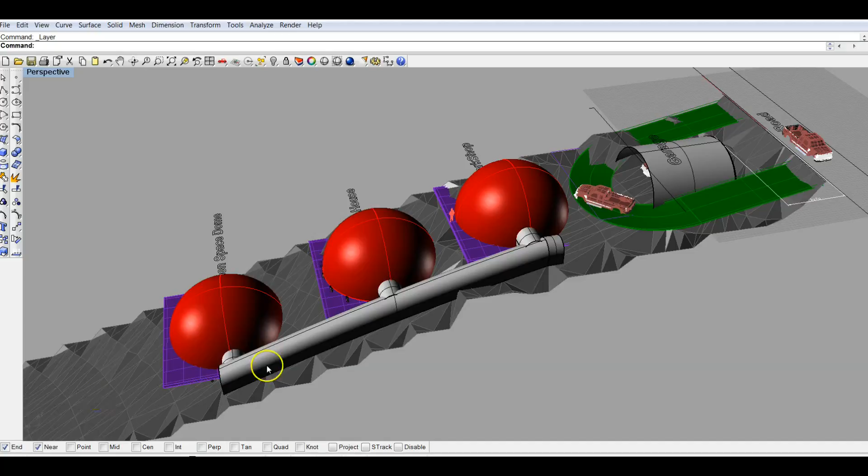So I'll show you a diagram of the property here. What you were just seeing was basically from sitting on the roadside looking down the property. So for this property, being how the land is sloping down like you see here, I came up with a design basically as a step platform.

My intention was to build 3 forty-foot domes going down the side of this mountainside, down the side of this hill.

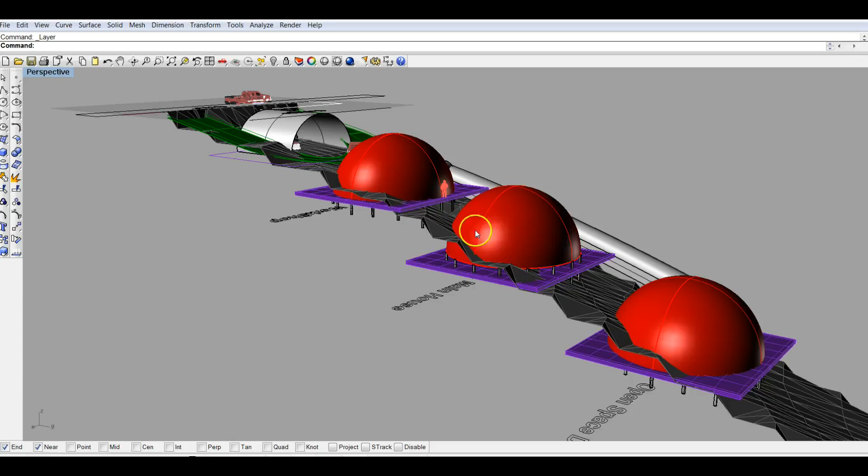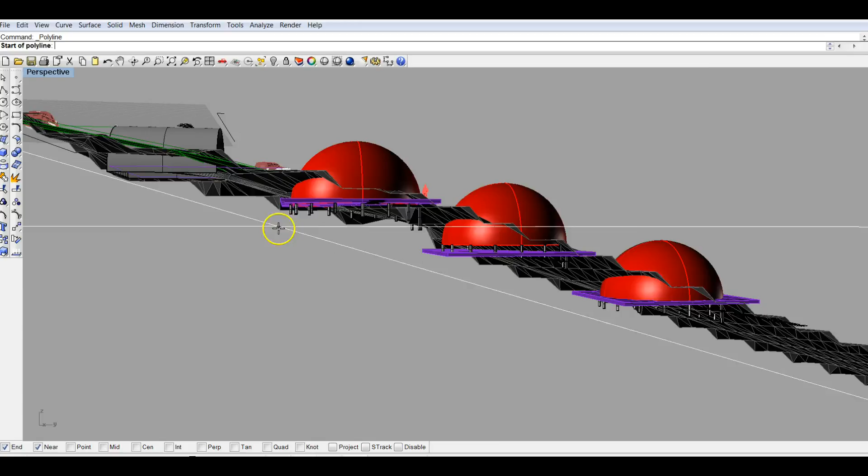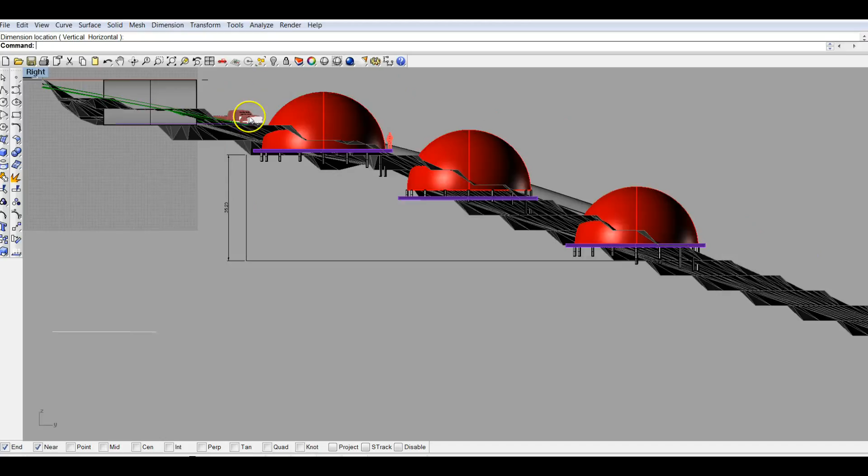The idea was to make these platforms and have as little soil to level out as possible. So I didn't want to go ahead and level out all of this soil to make a level ground, because it would have cost a lot of money to level all of this soil out. Say I wanted to level out from here to here, this would have been a lot of soil. This would have been 35 feet of soil, so it was a bit much.

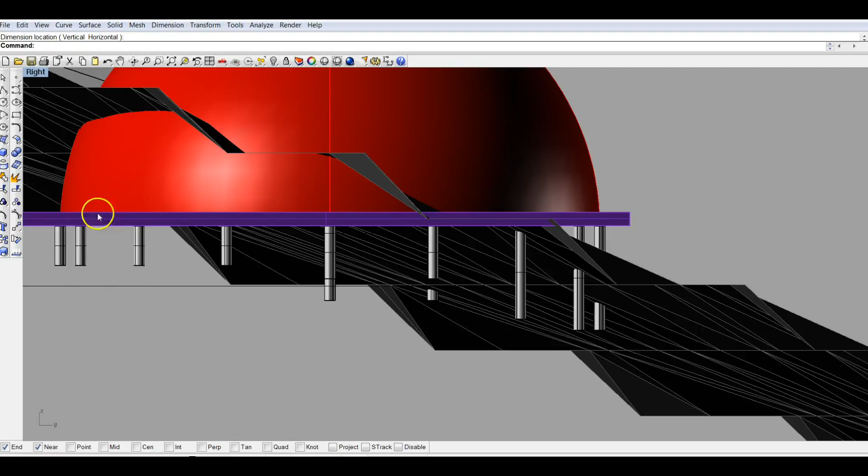So my idea was to build these columns into the soil that would give it support. You could see here it would basically stick out of the ground. One end of the dome here would be on the mountain, and then these columns would go into the soil so that you could build a platform.

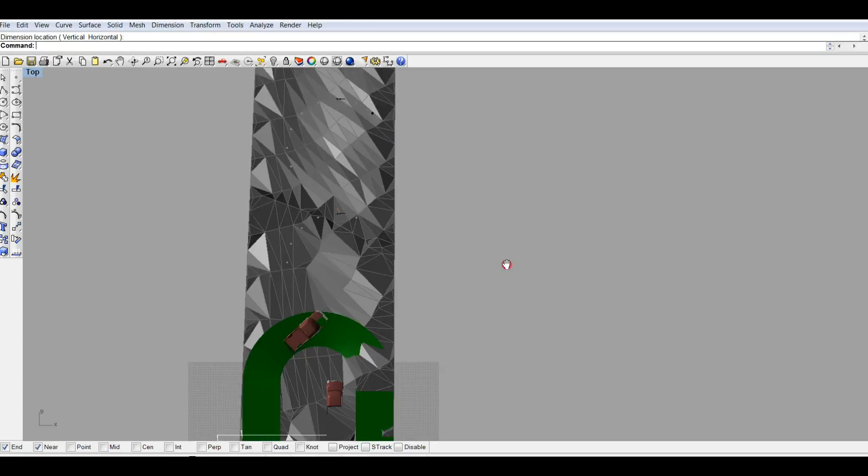So this was my original idea, and I could have my living space, my workshop. See, the idea was to build a U-ramp, right? Because soil needed to be brought in so that I can make a driveway. The idea was to have a driveway come down, an arch-shaped garage, maybe one of those tin buildings, the metal roof buildings, and you can have the parking space.

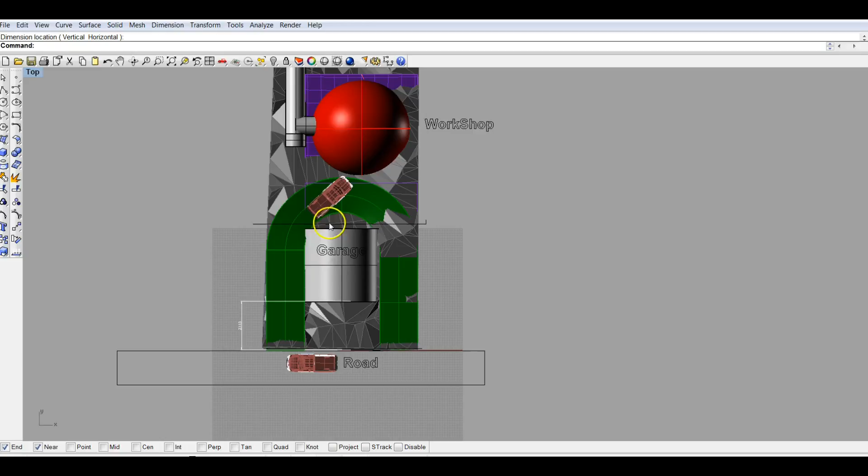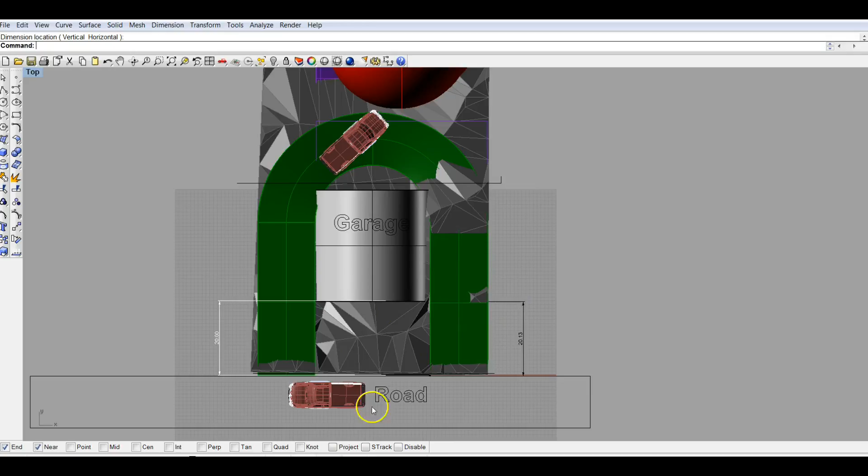What you see here is basically showing like a Ford F-150 pickup truck parking and backing into the garage here. I was just getting an idea of how much space there was, because with this area you needed to build your structure at least 20 feet from the roadside is where your structure started. So I was taking into account that 20 feet.

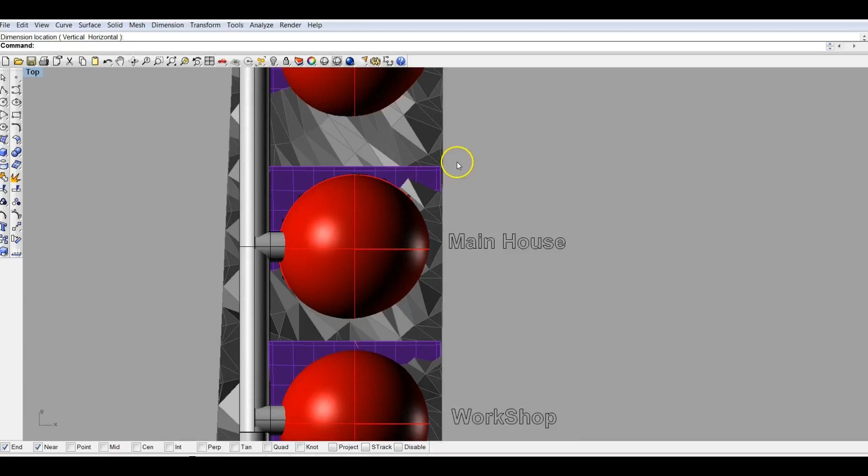Then I have a garage here. Then the idea was to have a workshop here for my CNC milling machine and my CNC laser machine, where I could create my artwork. Then here was a main house. And here was another open space dome to do whatever, maybe greenhouse or just another play area.

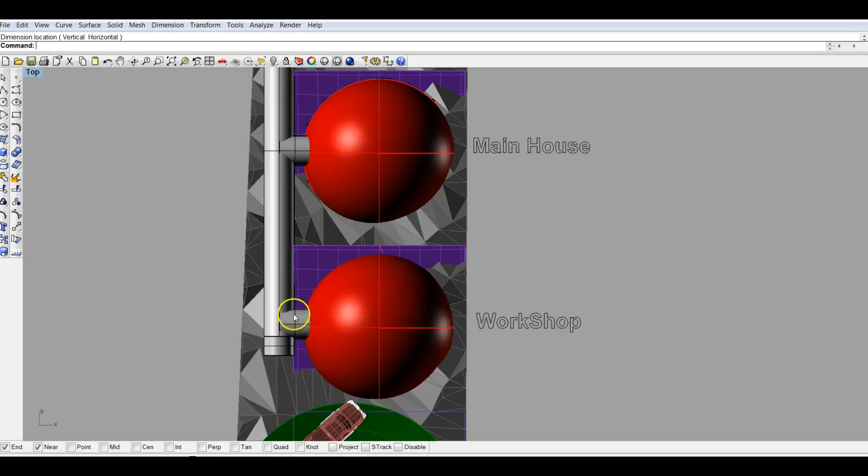The dome was actually designed to be a 2-story dome for the main house here. Even the workshop would have been a 2-story dome, because this was a 40-foot design.

And then I came up with the idea of having a tunnel that connects the 3 domes together, so that in winter time you didn't have to step out of the house to get to the next dome. You can do everything indoors. So this is basically the design here that I came up with.

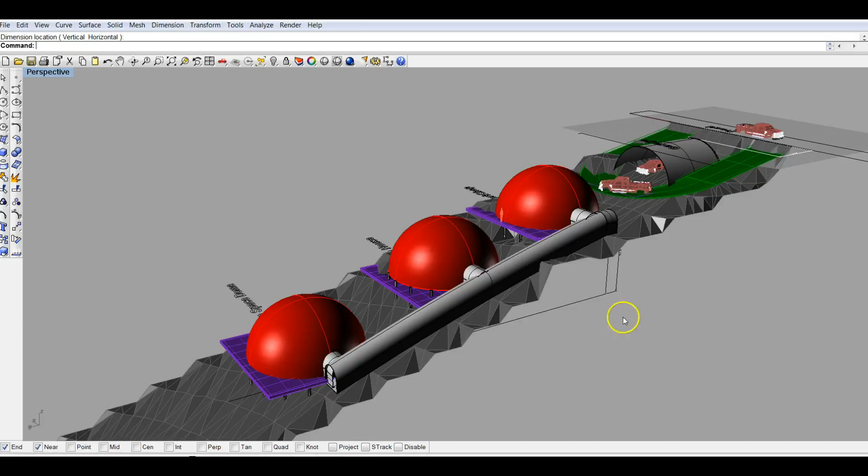I decided I won't be building on this property for a number of reasons, but it's still an amazing property.

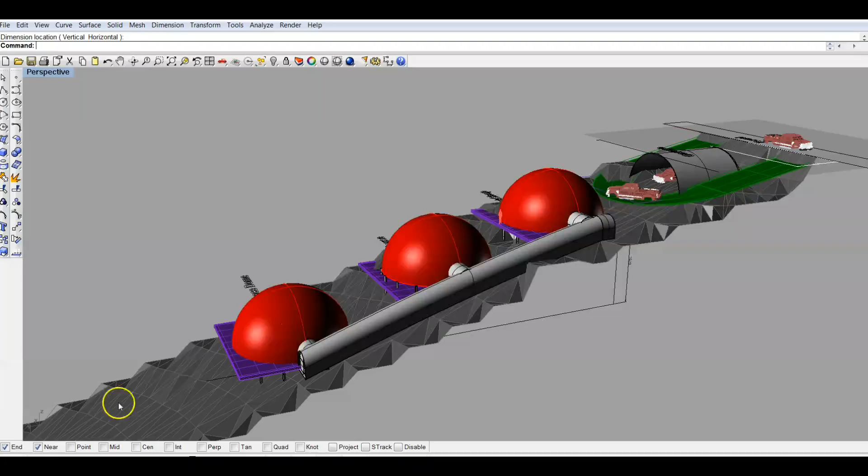And so anyway, this was the design that I came up with for that. So the property is about 60 to 65 feet wide on the roadside, and it was about 485 feet long. So I'm going to try and make a level here. This is pretty much exactly the level of the land, the slope that it has.

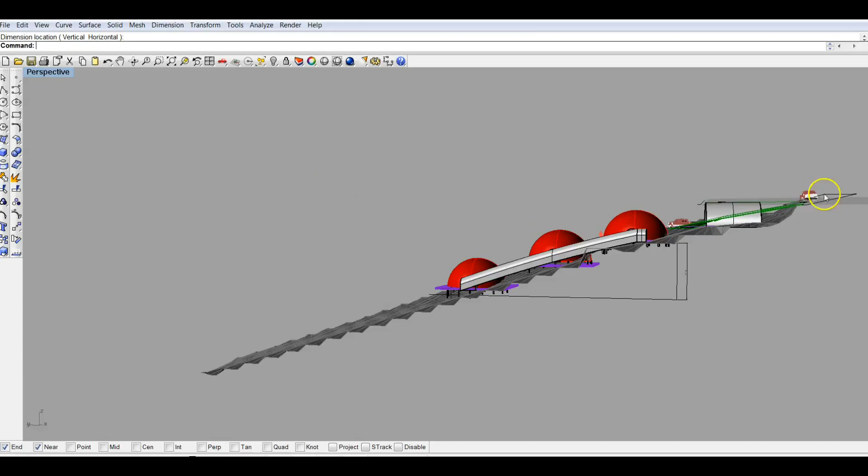And I think from the top, if I were to make a, let me see, I'll just do it real quick. I'll make a level line.

Let's say from the roadside, I'll come straight out to the bottom, cut down, and if I measure this, it's 119 feet to the bottom of the property from the roadside. So that's kind of the slope you're dealing with. Regardless, I chose not to build here for a number of reasons. Actually this property's up for sale right now, and wow, it's absolutely beautiful. It's probably the last piece of property in this area that's available.

Moving on from there, I came up with some other dome designs that I was interested in for the home. This is just to give you a rough idea of the layout. It doesn't include any doors or windows, and I was going a little crazy with this design, but I was just messing around with different designs to see what I would like.

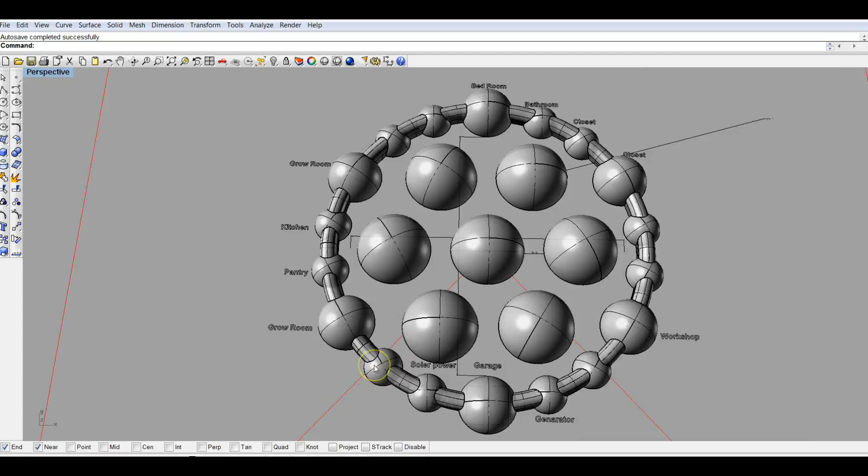I chose not to go with this design because there's really no way to close it off. I didn't really think of closing off these domes, and having these hallways attached in the center of the dome really limited what you could do with the space, because you had to have this open area. I didn't like this idea. I thought it was kind of cool, but I moved on from that.

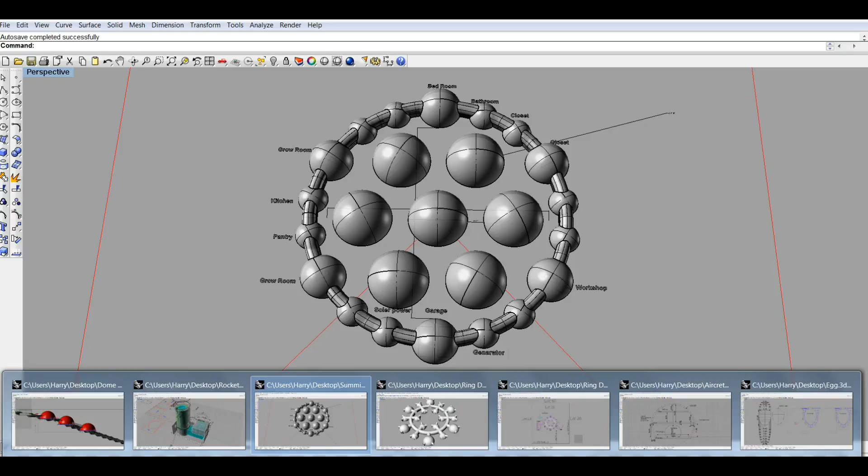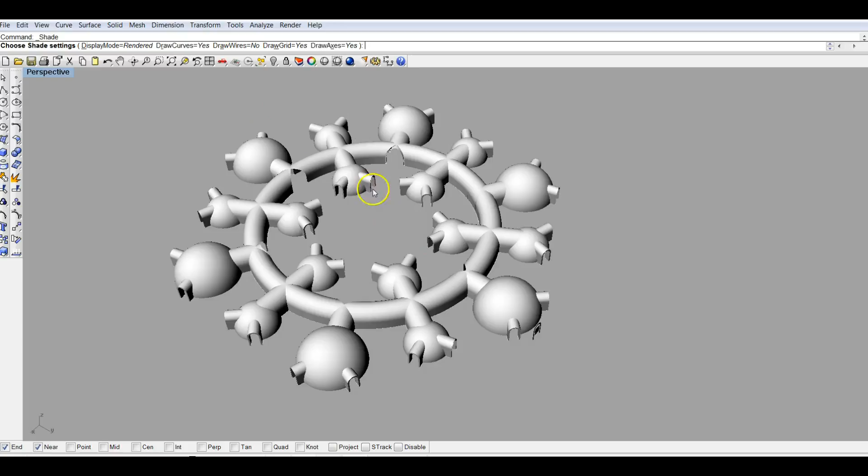Actually this is exactly the design I was going to build on another piece of property in Colorado. And this is more of the final design layout that I came up with.

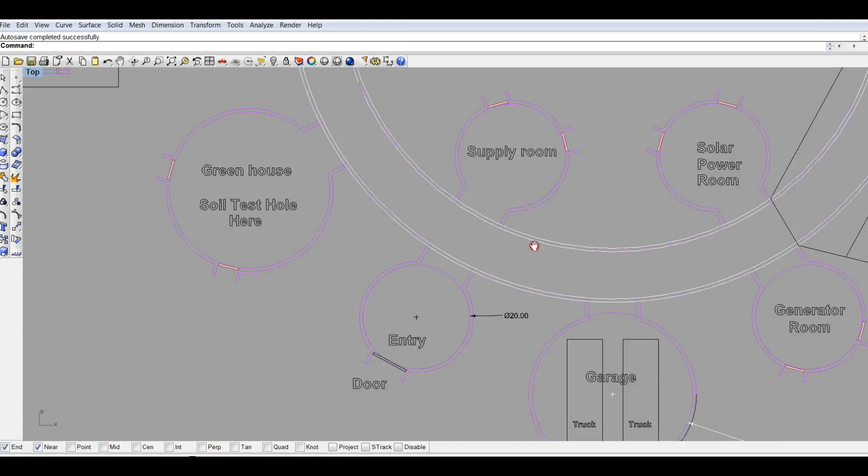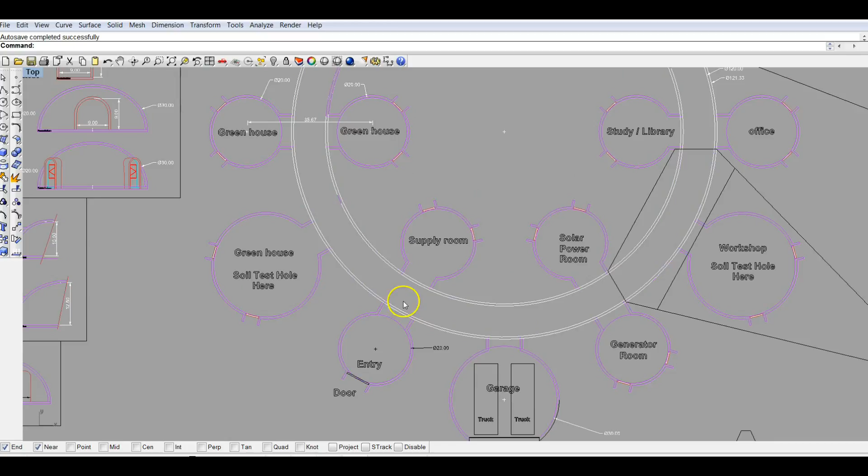Here you see I have a garage where 2 trucks could fit. This was a 30-foot dome. The idea was to make a 20-foot dome entryway where you'd walk into the home. This would be really the only door besides the garage door that would enter into the home. You'd have your mudroom and your closets, and everything would be in this 20-foot dome. Then from there it would connect to the main dome ring, which was basically a 122-foot diameter ring that connected all of the other domes.

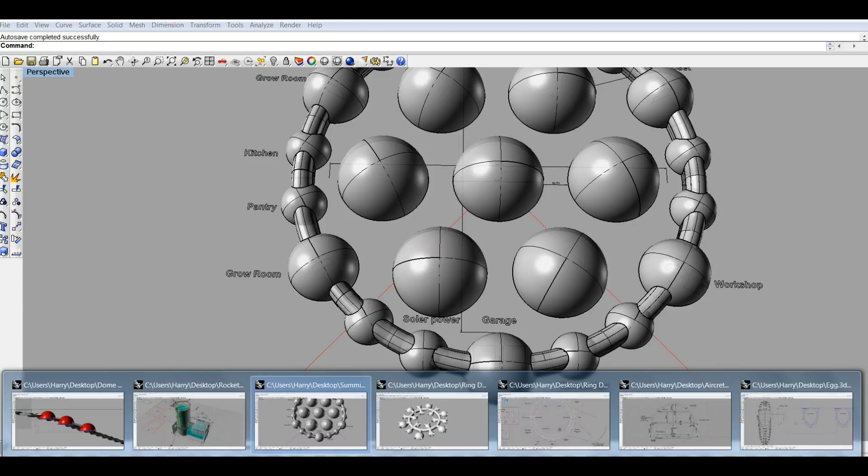So I like this idea better than the first one because I don't have these hallways going into the center of the dome. That was the idea for this. Now these domes could either have a doorway that separated the dome, or they would just be open to the hall. So you'd have a little hall area that goes into the dome.

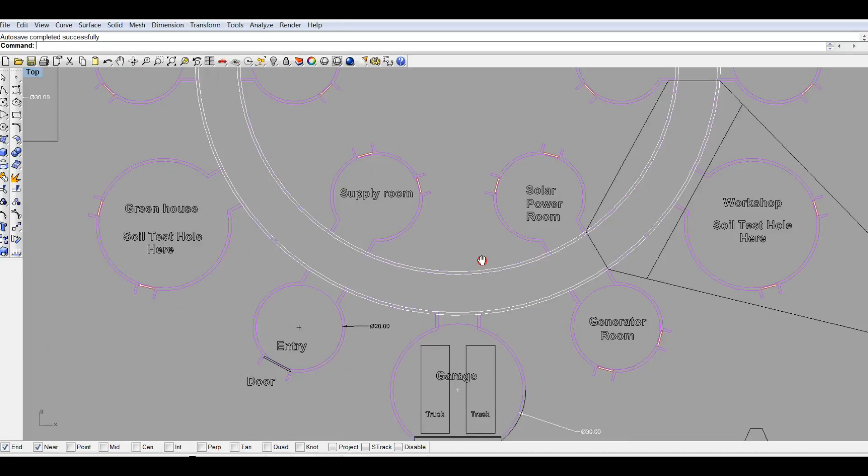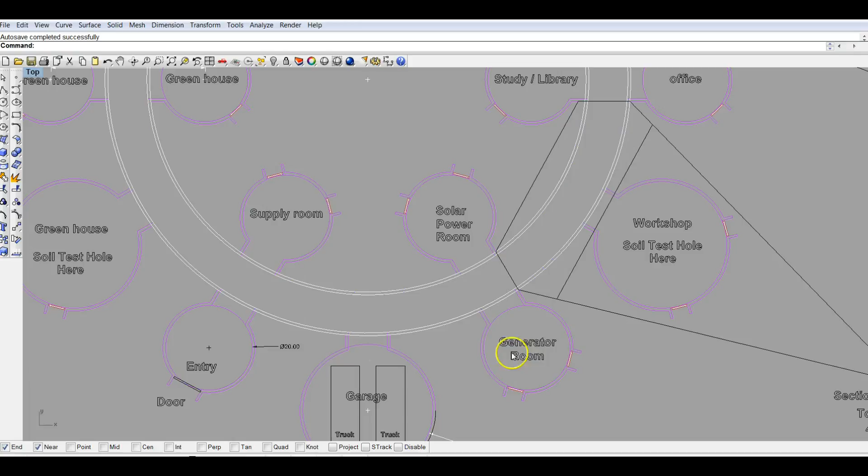The idea for this property, which is the design I show in a previous video where I talk about having a workshop, was to have a supply room, another room dedicated to the solar power — in other words, the battery bank and all the controlling system — and here is a room for a generator. Really, it's a bit overkill. The generator room and solar room could have been in the same room, but this was the layout I was working on, just having some fun with my design here.

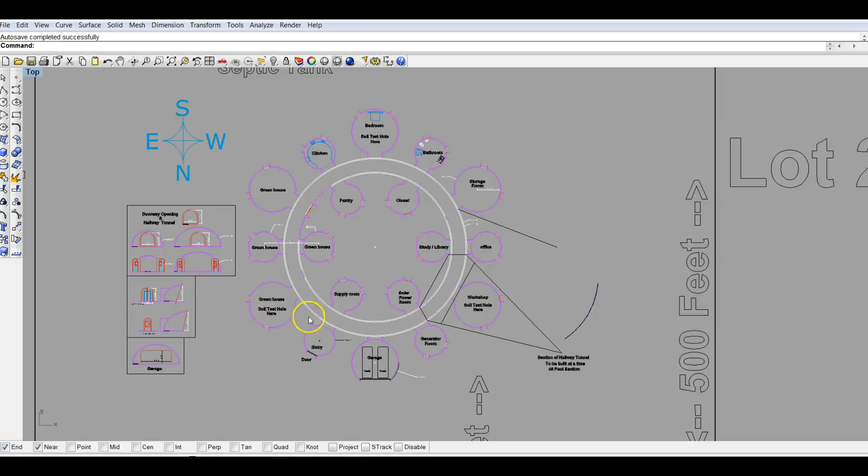Then here would have been a workshop. And in soil testing, the reason it says that is because I used this dome, and this one here, for where the soil tester drilled holes into the soil to test for percolation and structure. This was the perc test for the septic tank and leach field up here. The soil testing here was to see if it was firm enough to build on.

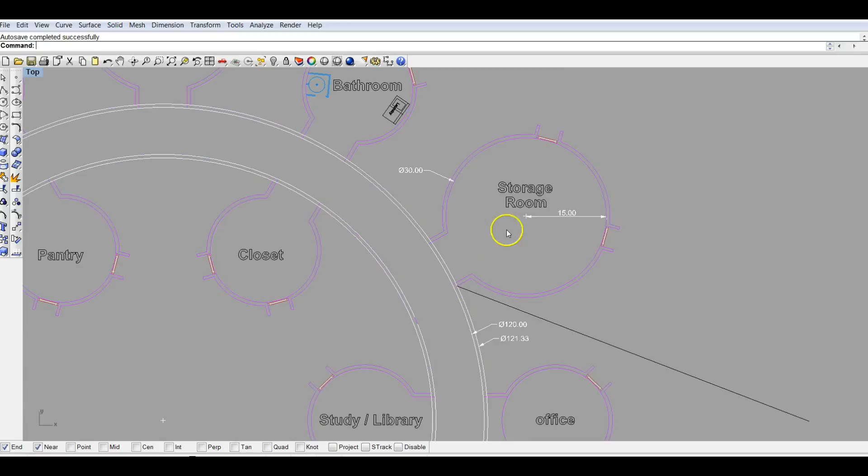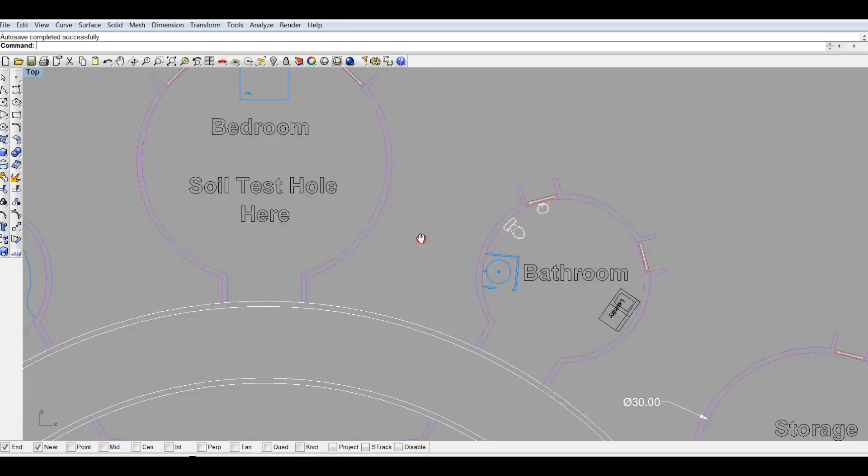So as we move on, the idea was to have an office, a library study, a storage room for things, a closet — a giant walk-in closet, a 20-foot dome walk-in closet, just fulfilling my lovely wife's need for a beautiful walk-in closet. Here was a 20-foot dome bathroom/laundry room. This would have been a 30-foot dome bedroom with a king-size bed, so you could get an idea of the scale of it.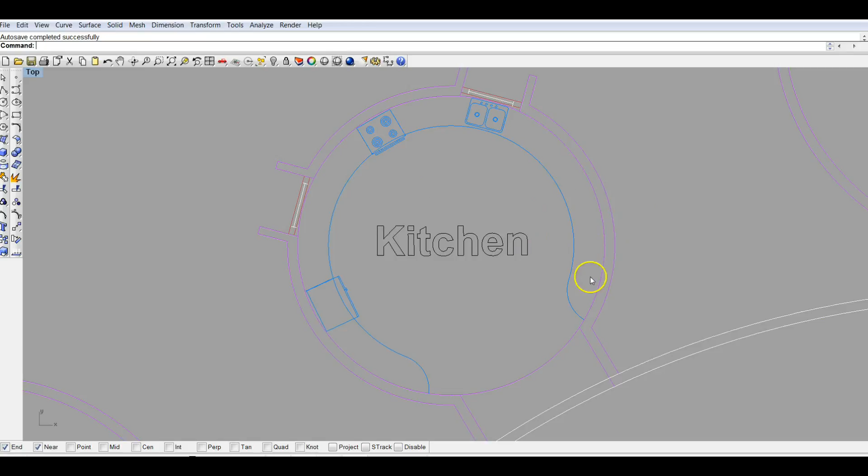My wife and I are vegan, so this makes for a nice large prep surface area for getting all your vegetables and things out. Right across from the kitchen was a 20-foot pantry closet or pantry dome room, which would hold a whole lot of food and be well insulated.

As mentioned, we're vegan, so this was a 30-foot greenhouse where we could grow our own food. And right here you see I designed the sliding door to enter into the courtyard, which would be a garden and just another place to hang out.

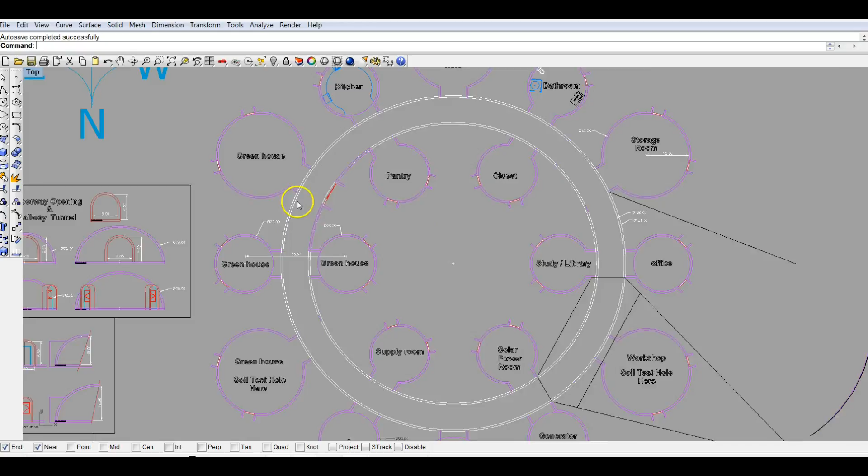This was about 60 feet from this dome to this dome. Any of the domes are opposite of each other, a 60-foot span. And again, two smaller greenhouses - maybe this greenhouse is all sprouts or something, and then another greenhouse here. So that was the basic idea, was to have 4 greenhouses, 2 30-footers and 2 20-footers.

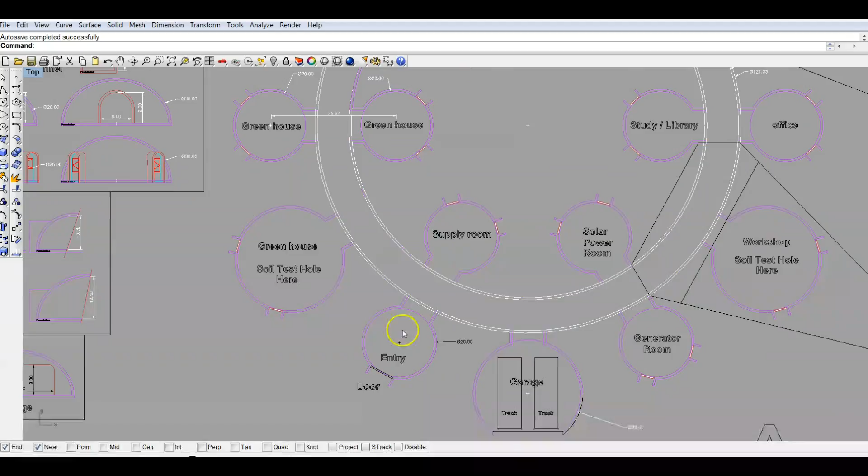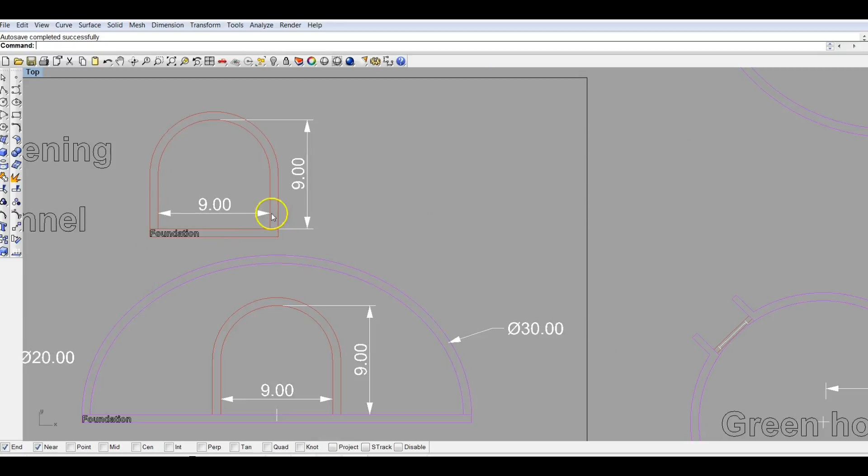And a supply room, and again, that's the entry. This is the profile, the side or front view of the doorway openings. So this tunnel that goes the entire circumference, this diameter is 122 foot, was meant to be 9 feet tall and 9 feet wide. And then all of the connections between the 20-foot domes and the 30-foot domes had this same 9-foot wide, 9-foot tall openings.

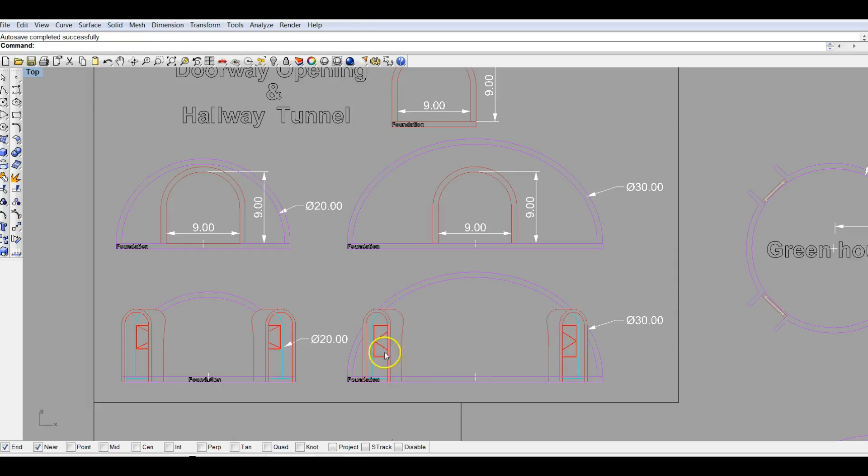So a lot of them would have just been open to the hall, and some of them would have had a door here. And here you can see the windows. And here would have been the garage - this is a 30-foot diameter garage with a 20-foot opening, 9 feet tall.

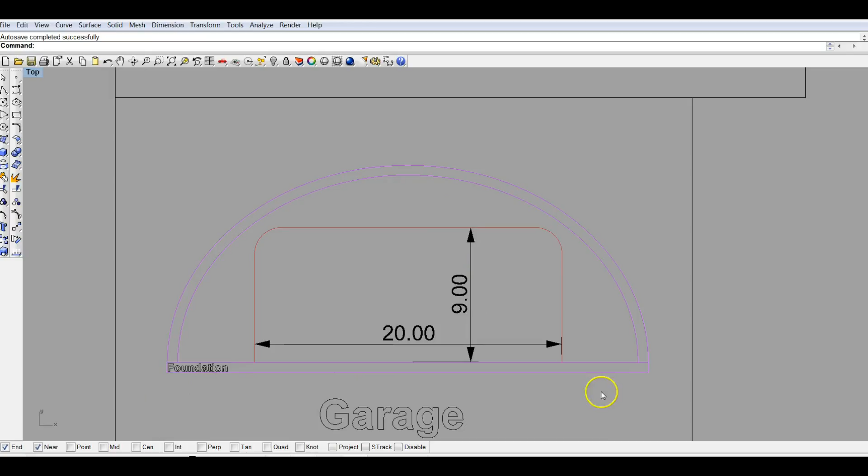Yeah, I was thinking if I get some monster truck tires, I'd have to make this taller. I can maybe build a stem wall and heighten this dome up for - yeah, I like big trucks. And I cannot lie. You other brothers can't deny.

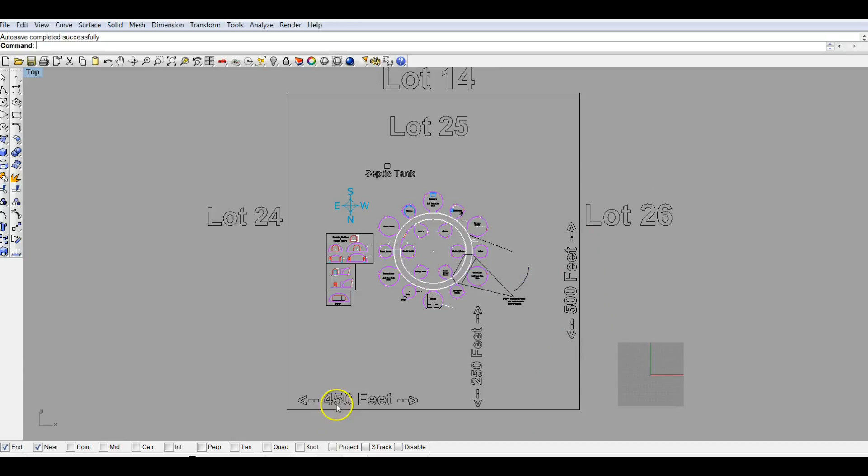All right, anyway, so this was the design that I came up with. And that lot was a pretty big lot, 500 feet by 450 feet. And the design I did here was dead center of the lot.

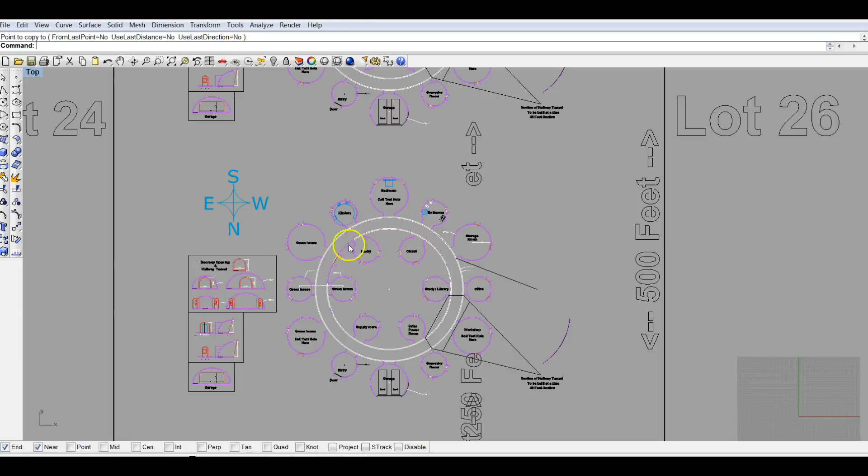But later I changed my mind and said, hey, you know what, it'd be better if I move this over so that maybe in the future I'd do another one for a business, like a meditation workshop and float tank rooms. I really like the idea of these float tank rooms. And anyway, I have this whole design for something else.

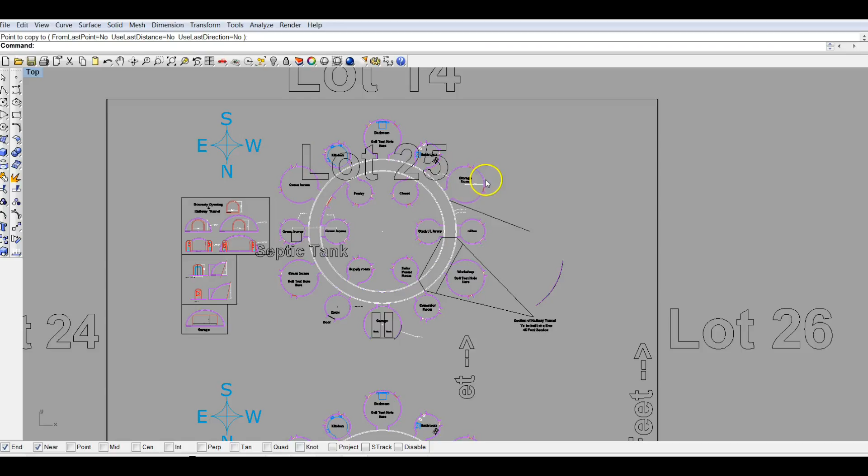But what I learned is the area I wanted to build here was not the most comfortable because of the height. The altitude of this land was 9,200 feet, so just walking around was hard to breathe. So the idea was, you know, because of the cost, the land was inexpensive, but it's not the most ideal. So we've changed our minds - we're not going to be building on this lot either.

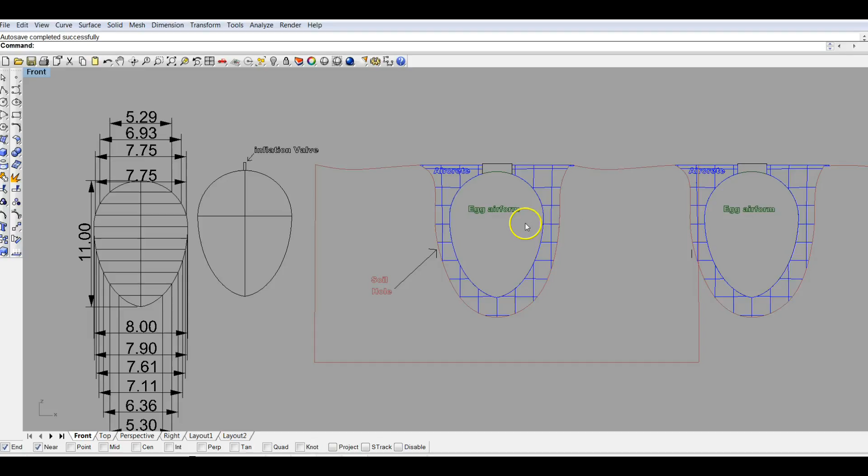But this was the design that I came up for that lot. Let's see, another thing I want to share with everyone is my egg shape design. So for whatever property I build, or even any property you might be interested in building in, I had an idea for a water storage tank slash septic tank, which was in the shape of an egg.

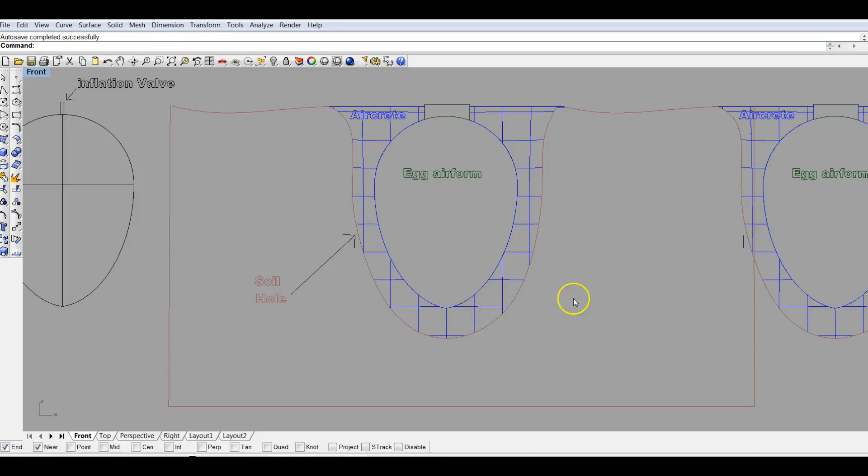So I came up with this egg shape here that's 8 foot in diameter at its widest point and 11 feet tall from the tip of the egg to the top. And basically the idea I had was for making underground water tanks out of concrete. Concrete or Aircrete - if it were Aircrete, it would just be a very dense Aircrete mix, not adding a lot of foam to your cement slurry, so that you had a very solid tank and didn't have to worry about any leaking from the tank.

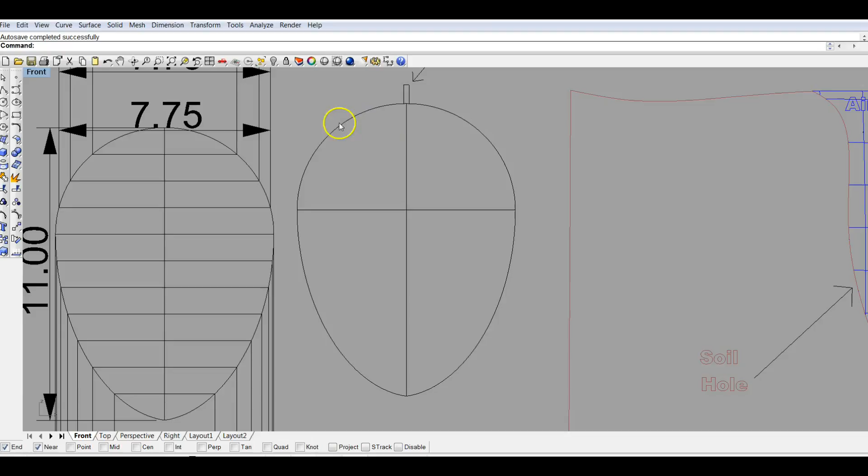So basically I had an air form made in the shape of an egg, this design here, and this is the inflation tube - you fill it with air. And the idea would be to wrap this egg shape in basalt mesh and then wrap basalt rope around that mesh. And then once the egg air form were wrapped, you would have a hole dug already, probably 2 feet larger than the air form, or maybe like 1.5 feet larger, so that you had like 8-inch thick walls or something like that.

And then once your hole were dug, this line here represents the soil. So once this yellow part were dug out, you would place your air form in the shape of an egg in that hole, and then you'd fill with either Aircrete or just regular concrete all around the egg.

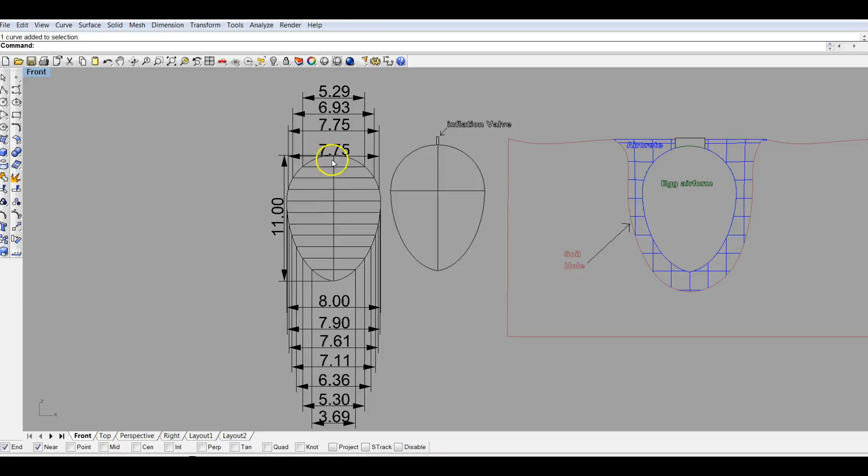Once that cured, you just remove the air form and you'd have this egg shape tank for storing water. This would store approximately 4,000 gallons, maybe a little more. I didn't do the exact calculation, but you can get an idea if you wanted to do your own calculations. These lines represent a foot in between each, and this is the size of each of these marks. So anyway, it's approximately a 4,000 gallon tank.

Now the idea behind it is this egg shape will cause a natural circulation of the water. Again, this was for water storage or even a septic tank, but for water storage, you would have a temperature difference between your concrete wall around the egg, as opposed to the center. That temperature difference would cause the water to circulate.

Let's see, where's my tool? I don't use this pencil tool much. Never mind, is it here? Anyway...

It would circulate, so you wouldn't get water that stagnates. The other idea I had was to put a small lily impeller design at the bottom here that requires very little electric, and that would spin and create a vortex in the water, keeping it moving. That would also keep it from freezing.

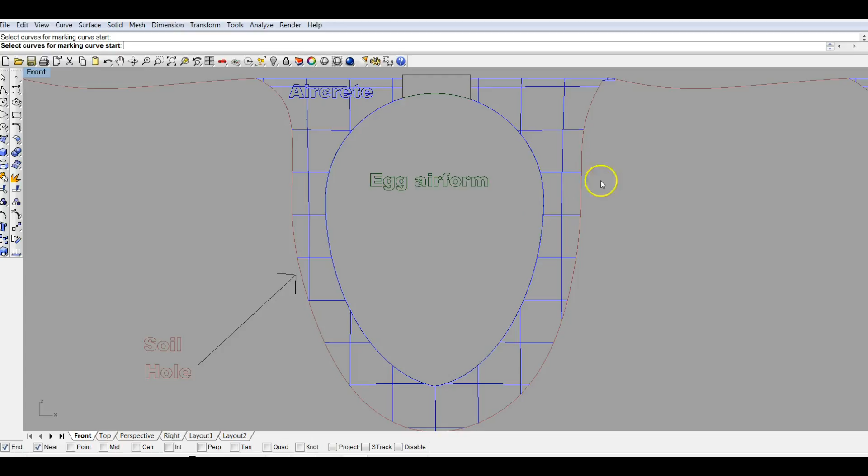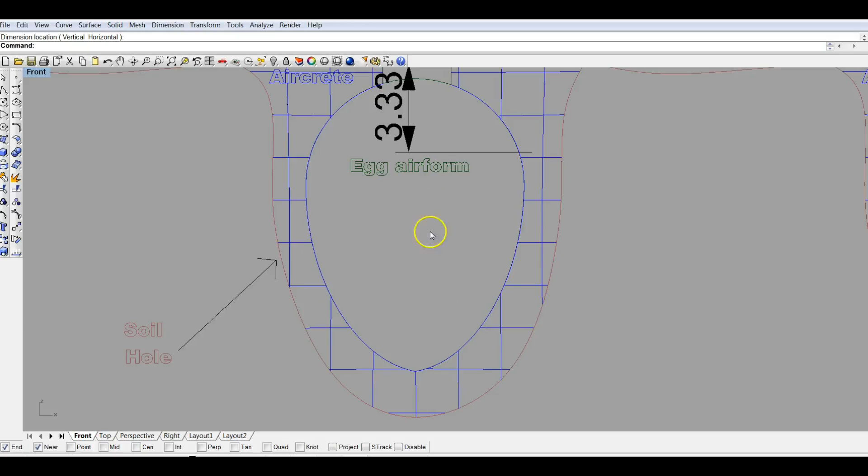But being in the ground like this automatically keeps it from freezing, because your frost line, especially in Colorado, is about 36 to 40 inches. Let's just do 40 inches. Yeah, this would have been 40 inches there, and then you're going to have a normal temperature of around 50-something degrees. So your water wouldn't freeze, and it would be constantly circulating because of this design.

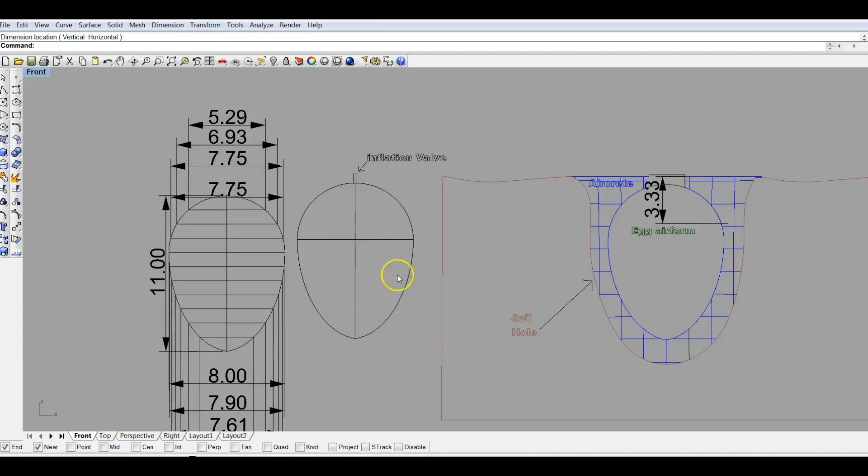So anyway, this is my egg shape water tank. I do have this airform to create this. If you look at one of my videos where I talk about the building supplies, I actually don't mention this egg shape, but it's in those airforms in my video.

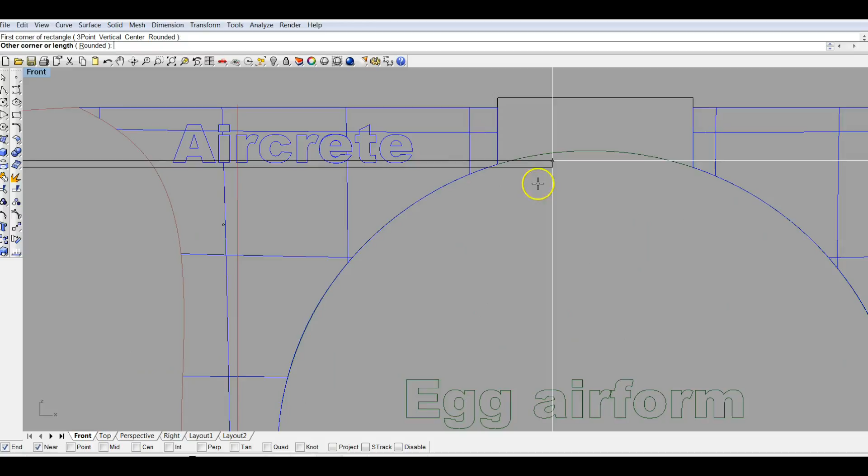So this was something I came up with, and obviously you could build multiple tanks around your property for water storage. You could, for example, just have a pipe -- got snaps on -- you could have a pipe to overflow from one tank into the next.

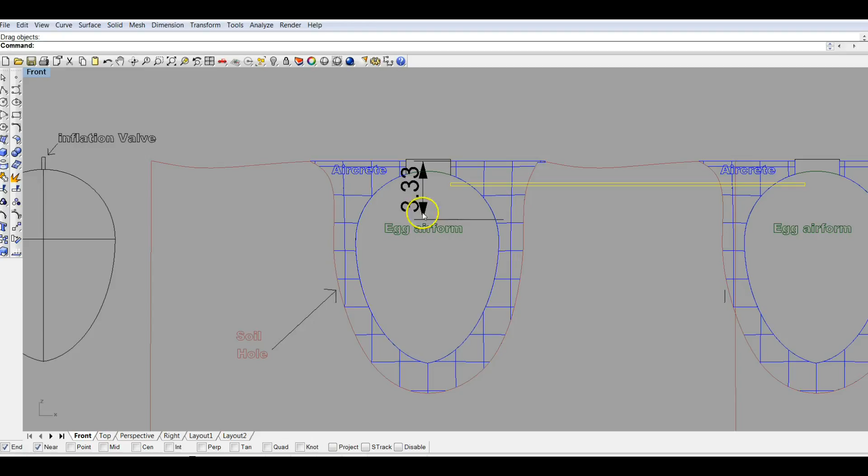I think it's a really good idea in the way I designed this, and the simplicity of building an underground water tank. To be honest, the same airform could be used to make an above ground tank. I would just flip it on its axis and have the pointy top up, obviously having a wider base if it's above ground.

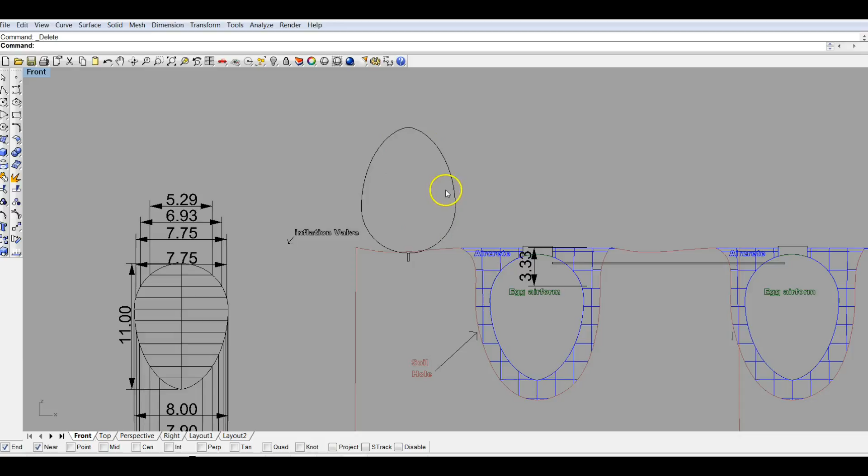The water tank could be made this way too, where you just wrap it in basalt mesh or even basalt rebar. But the idea is really basalt mesh, because it would be a little less money and still very strong. Then you cover that in ferro cement, which is regular cement. You just cover this in cement, let that cure, and you'd have your above ground water tank. But again, the original idea is to have an underground tank.

Moving on to another design that I came up with. This design is for a dome home in Puerto Rico. This original design I came up with for Puerto Rico, but obviously it's good for anywhere. When Puerto Rico was hit by the storm, there were a lot of areas flooded with up to 10 feet of water. So having that in mind, what I came up with was a dome.

It's basically a spherical dome. You can see about 6 feet of the sphere doesn't exist -- that would be, if you were to continue the circular shape, about 6 feet would be in the ground.

I think this is really an aesthetically pleasing design, as opposed to having these walls come straight down. If I built it where the walls came down, it would basically look something like that, where the walls are straight, which is still fine. But for aesthetics, I like this design a little better.

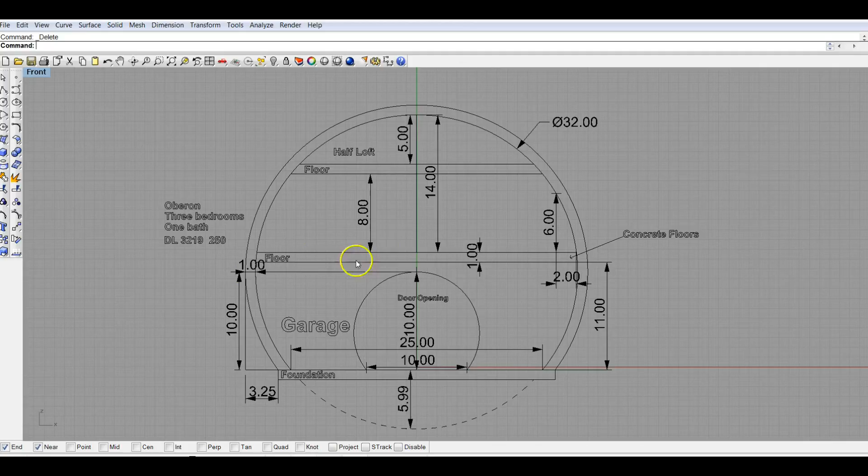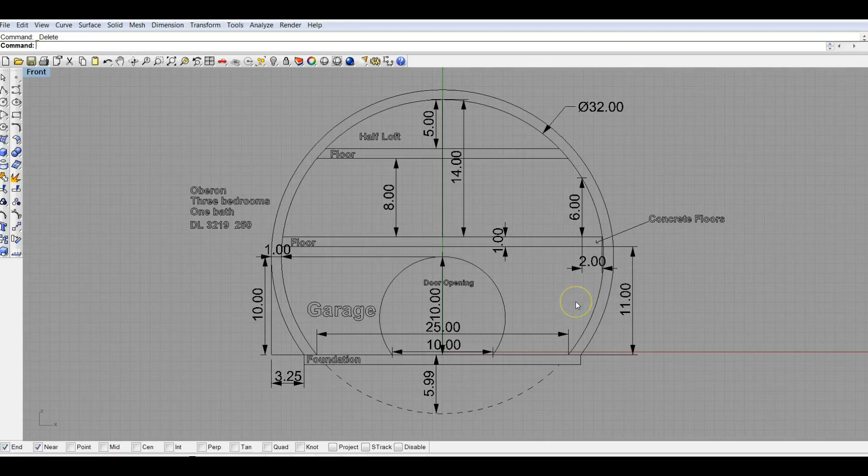So what I designed here was a 32-foot diameter dome -- at its widest point on the interior walls was 32 feet. The idea was to build it using 3 inches of structural layer cement and then have 9 inches of aircrete. You'd have a well insulated area for the Caribbean.

The opening here is a garage. Let me remove some of these measurements. Actually, I'll leave this here.

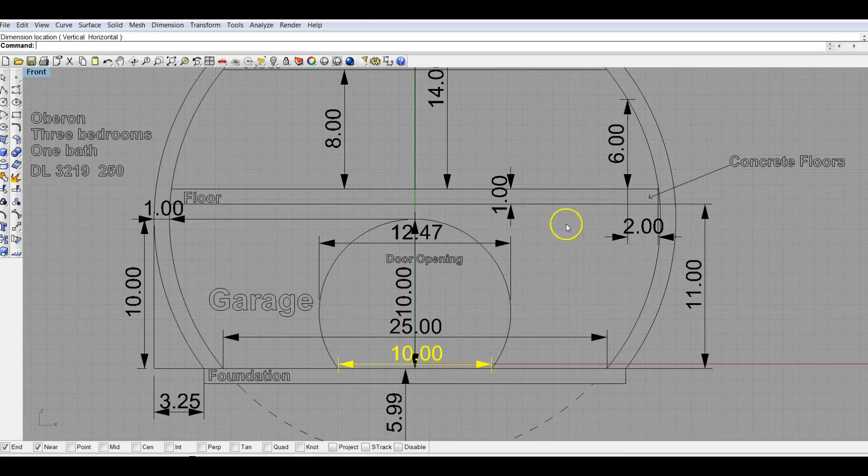The garage door opening is 10 feet tall and 10 feet wide at the base. It's actually wider at the midpoint, 12.5 feet at the widest point. But what matters is there's enough space to drive your vehicle in, and still have plenty of space for storage or even a hammock. This could be a hangout spot.

You can have more than one opening. You can have an opening on all 4 sides if you wanted, or even just one side. And then the idea was either on the inside or the outside, there'd be a staircase that goes up to the second floor.

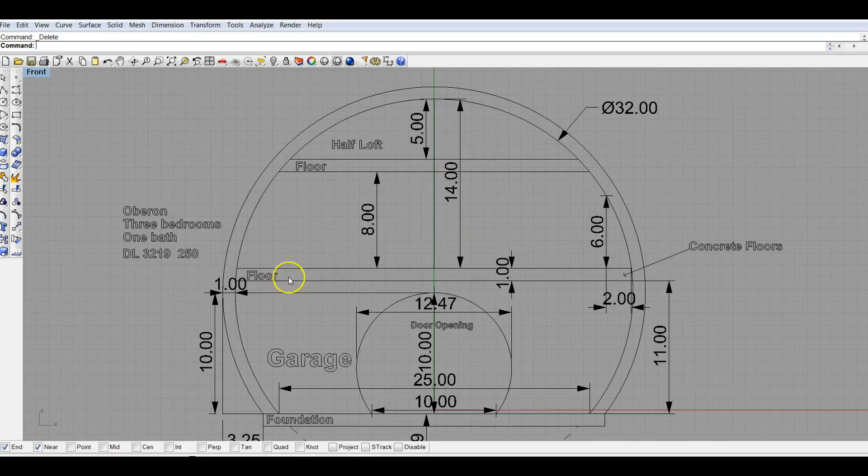The second floor design I have was for 8-foot ceilings. Just half the dome would be 8-foot ceilings, the other half would be open. So it would be 14 foot tall ceilings. And I'll show you the floor plan that I have for this dome design.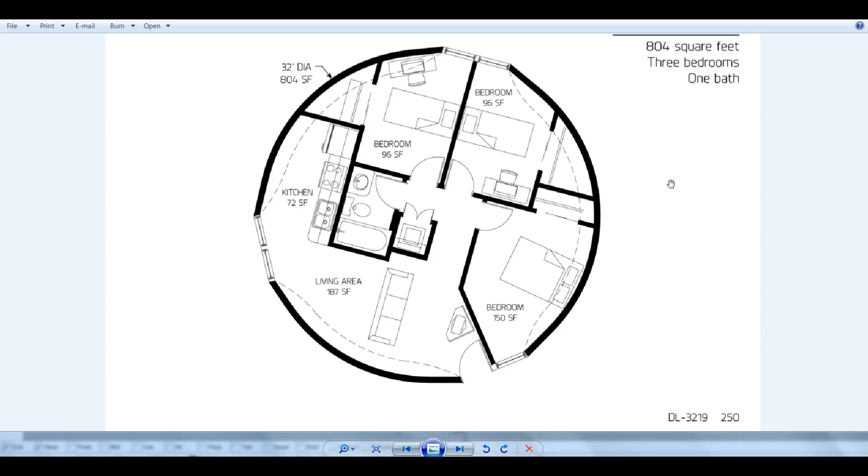So I was trying to think of a good size that would work for Puerto Rico. When I look at the different homes out there and the sizes, I felt like this was a good size. But even this could be changed. If someone just wanted a 2-bedroom, you'd have a lot more space. Say you eliminate 1 bedroom, you can just have a lot more space. So the floor plan can be changed, but this is just to give you an idea of a 32-foot diameter dome.

So this floor here is where that living space would be. And I thought that was a really good design. I really liked it because, as I mentioned, there was flooding from 10 to 11 feet in a lot of areas in Puerto Rico after that storm. So that's why I designed it so that the second floor was at least 12 feet high, with 11 feet to the bottom of the floor to the second floor.

So say if you have water that came in - let's say there was another storm, hopefully not, that was this bad and the water came in, like Maria - you could still be safe inside your structure, in your home, because it's concrete.

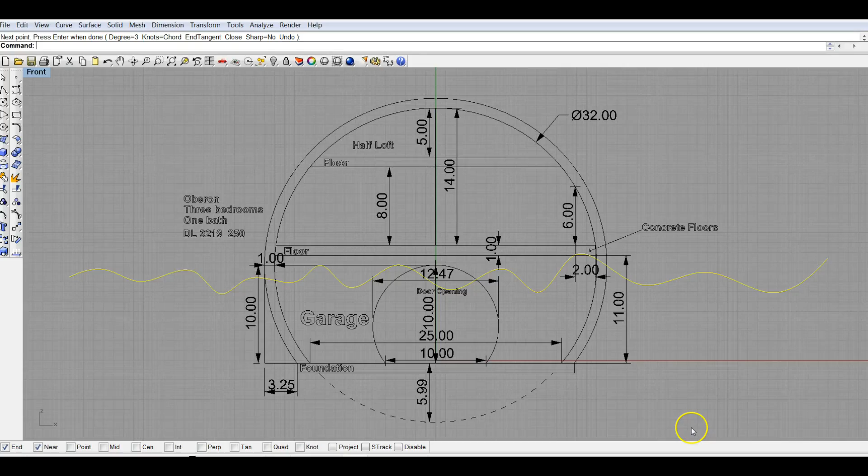So anyway, in this design, I don't have windows indicating - I just have the garage door, but you could imagine there would be windows around. Well, actually here you can see there's windows, a doorway here, another window there. So that's the design that I came up with for the Caribbean.

Again, I designed it for Puerto Rico, but obviously all of the Caribbean could use a design like this. And this airform—say someone's watching this video and would like to have a dome built—this airform to build is about $12,200 to have the airform made, and to build a building of this size would cost approximately, I'm just going to say it's an approximate, $60,000 to build what you see here. It may be a little more or less depending on the area, depending on the cost of cement.

But the good thing is, using this airform technique that I would use, the structure could be built within a week. Basically a week, figure 2 weeks total, and a finished concrete Aircrete insulation structure can be built. That's really fast, and for $60,000, I don't think you can beat it.

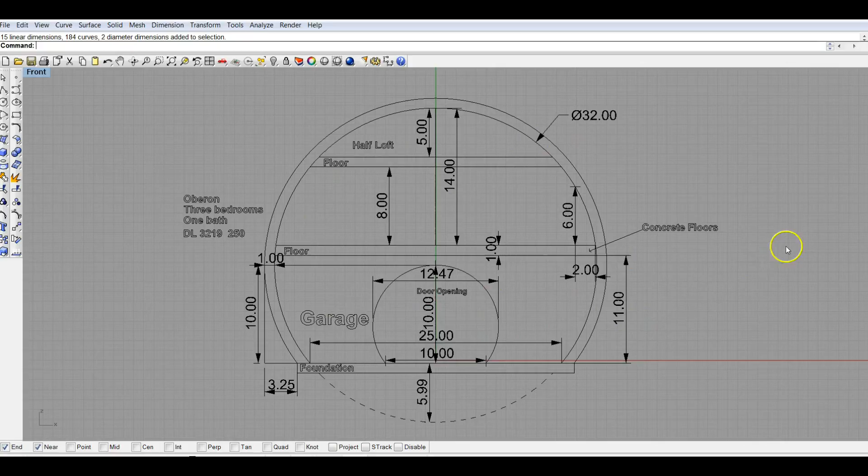And if anyone's interested, let me know and we can make it happen, because if you look at my previous videos, I have the equipment now to build domes, like the cement pump and the shotcrete spray nozzle. I have a lot of experience with Aircrete, and anyway, that's the design that I have for the Caribbean.

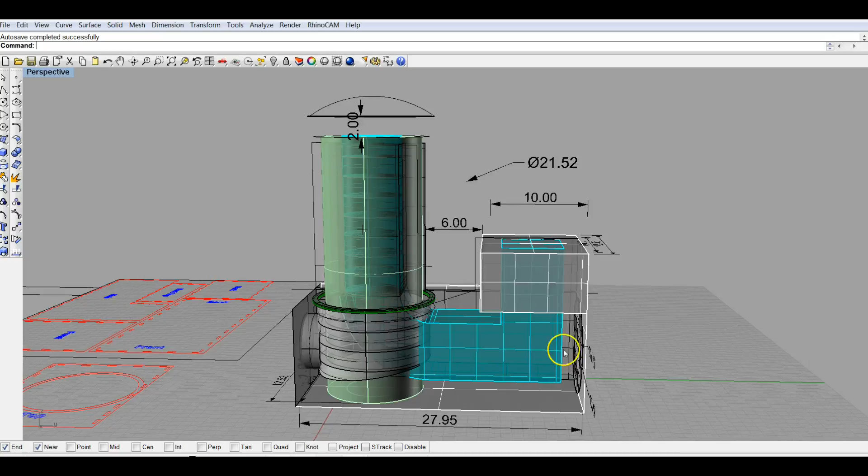Let's see what else I have here for designs. Last thing is—man, when did I come up with this one? Last year, 2017, around November, I came up with this simple design for a rocket stove. Now this is not for the Caribbean, it's plenty hot down there, they don't need a rocket stove. But this is for the rest of the world where it's cold. I have this design but haven't built it yet.

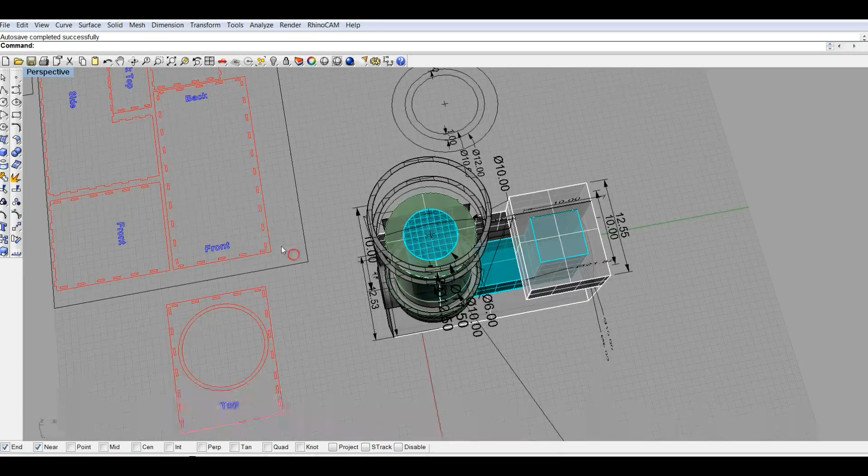You see here, these were my wood panels that I designed, and I actually cut them out already on my laser machine, where everything just snaps together and you can form a box. Then you'd fill this with a special Aircrete mix that I made up—it works really good for rocket stoves.

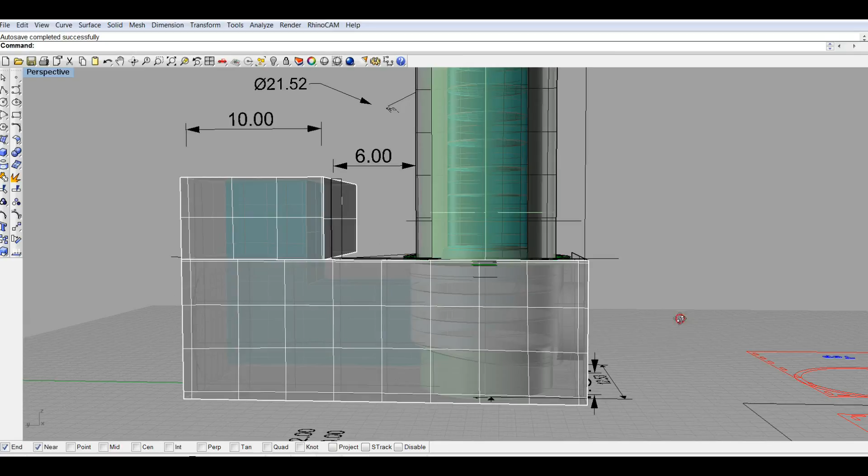I mean, it really increases the efficiency of a rocket stove tremendously. So here I was just working out all the measurements based on other videos I've seen of people designing rocket stoves, and the idea has evolved from this.

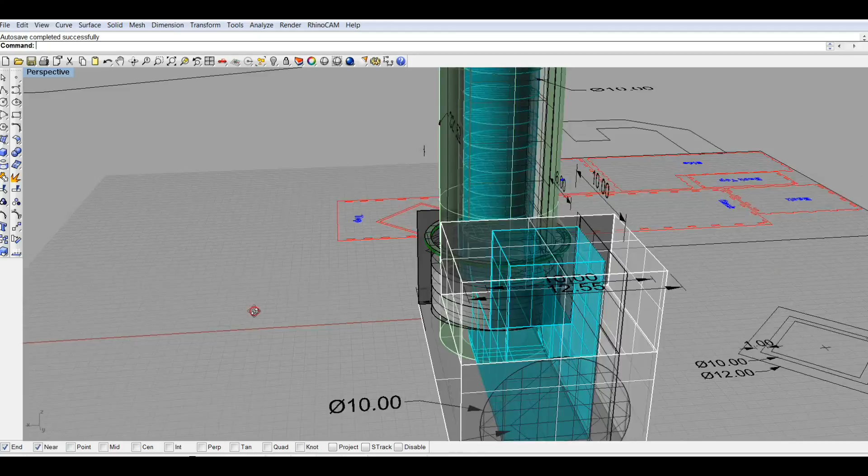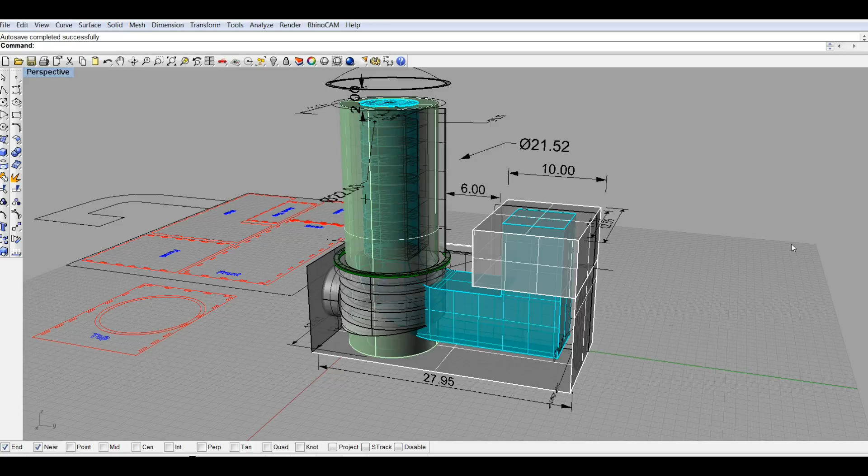I made this design so that anyone could make a rocket stove with great ease. I'll be making a video sometime in the future where you can see me actually make the rocket stove, and see the rocket stove in action. I'll also have a temperature gauge and a thermal imaging camera to show the heat, where it is and where it isn't, and exactly how hot this chamber will get.

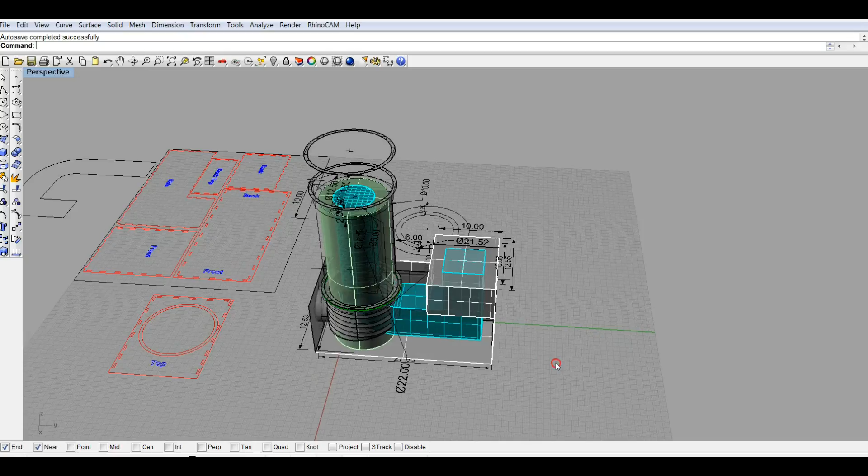Anyway, this was another design that I worked on in 2017, I think around November, and it's almost a year now, so I need to get this one made. I plan on making it pretty soon.

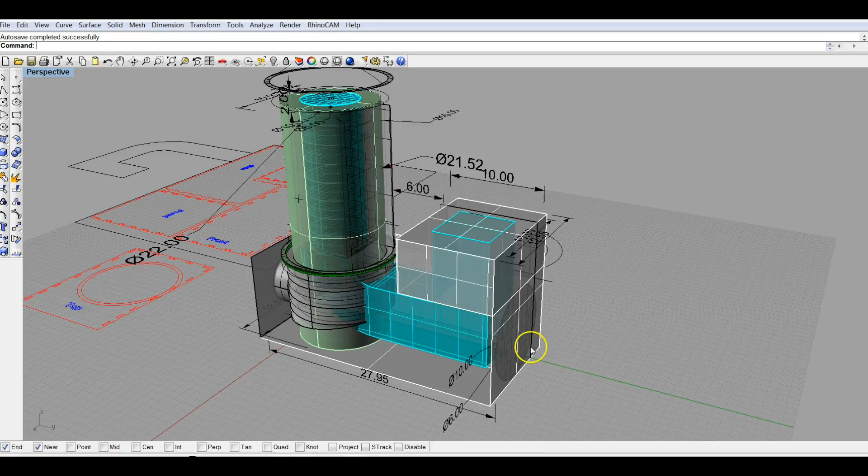Again, the idea is to make it so simple that I'll have these forms made already where you could either cut your own panels into the design that I have, or just purchase everything pre-cut in a nice slim package. You just assemble it and fill it with a special Aircrete mix that I would send you, everything you need to make it. It's a really cool design.

But I have a lot of different designs that I've worked on for different things here, and I just wanted to share some of these because I don't really get to share too many of my ideas. What I realized is it's good to share ideas so you can inspire someone else—not only to build their own, but to know there's something coming down the pipe that can really benefit humanity.

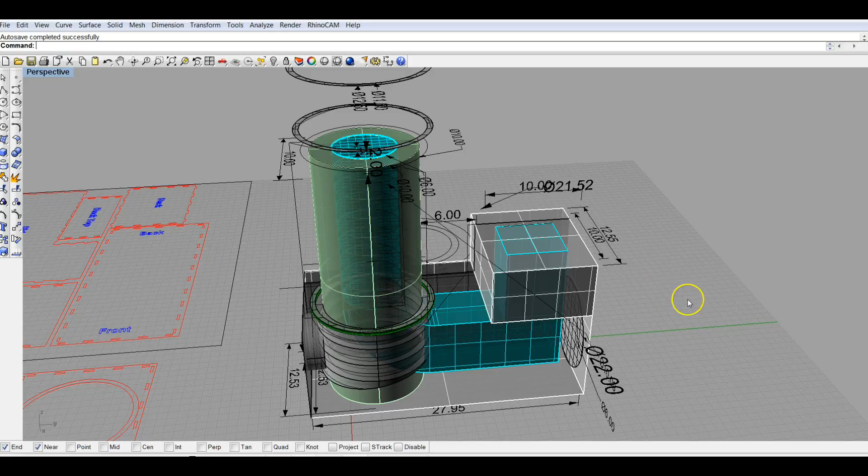I'm planning to start sharing some of these ideas. In the past, I was always worried about someone stealing my ideas, but that's really nonsense, because I realized there are some ideas I haven't seen anyone else make yet. And if I don't make them, they might not come out, and humanity won't benefit from it. So we all have something to contribute to help our fellow brothers and sisters on this planet.

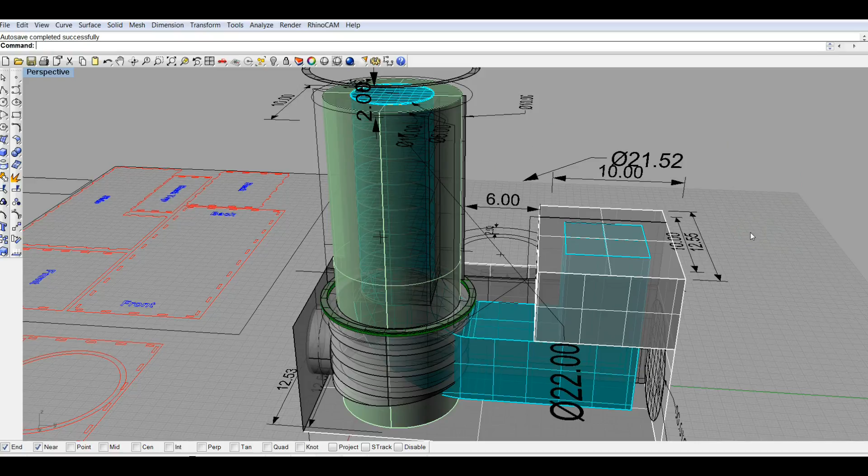So I guess this is another way of me helping and sharing ideas, just like I do with all my Aircrete experiments and different designs.